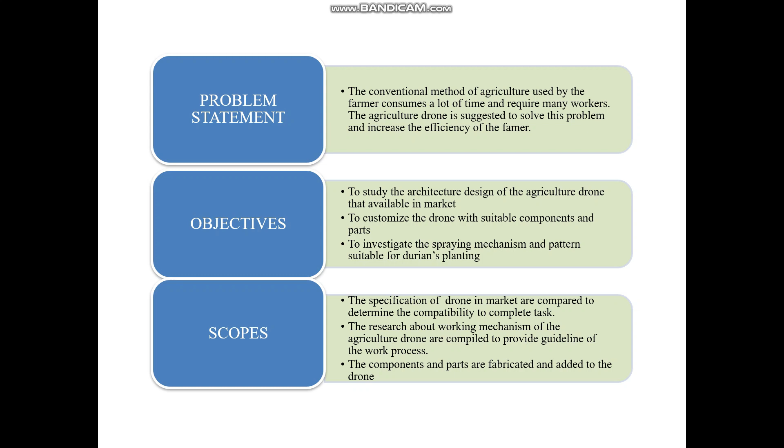Next, I will proceed with the literature review. There are four types of application of drones in durian agriculture. The first one is crop spraying. The drone can be used to apply fertilizer to the durian tree. The foliar fertilizer method can be used, where the drone applies diluted fertilizer directly to the leaves of the tree.

Next is spot spraying. The drone can spray individual weeds and also target insect infestation without needing to cover the entire crop. The third application is crop mapping and surveying. The farmer can use a drone equipped with camera and sensors to collect information regarding the overall crop and plant health, land distribution, current crop cycle, and a detailed GPS map of the crop area.

The last application is irrigation monitoring and management. The drone can be equipped with a thermal camera to spot temperature differences and patterns to measure the existence of moisture. This will prevent moisture stress suffered by the plant.

Now I will continue with the basic principle of the drone. The drone is made up of chassis, propeller, motor, flight controller, and battery. The chassis acts as the skeleton of the drone that holds all the components and parts together. The motor rotates the propeller to provide the required lift force to fly the drone. The flight controller contains an onboard computer to control the rotation of the motor and the direction of the propeller. And the battery is used as the power supply for the drone.

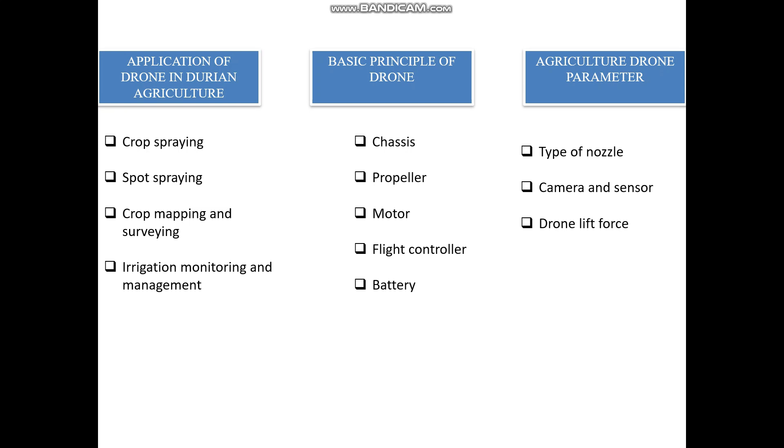Next, I will continue with the methodology of this project. This is the flowchart of my project. It starts with the literature review and the comparison of drones in the market. Then, product specification, conceptual design, screening and scoring were made to obtain the design of the drone. If the design satisfies the customer requirement, then I can proceed to the detail and fabrication. After that, the prototype of the drone is ready to be tested.

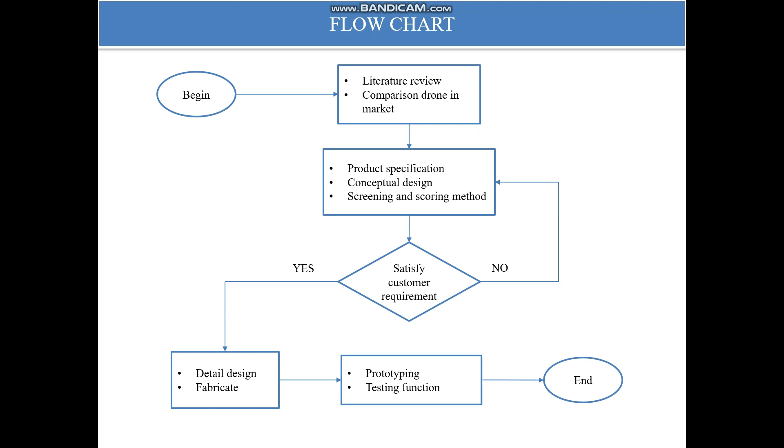I will proceed with the customer requirement. The first one is spraying function. The product needs to be able to apply fertilizer, irrigation, pesticide, and herbicide to the crop. Second is portable design. The product needs to be easy to be carried around anywhere.

Next is affordable price. The price of the product should not be too expensive for the consumer. As for the durability, the product should not break easily by random hazard. And lastly, reusable. The product needs to have a long lifetime and can be easily recharged for continuous uses.

Next, I will go through the engineering characteristic. For the type of material, the material used for the drone will be mostly reinforced plastic that is durable, lightweight and flexible. Next is portable design. The drone can be disassembled to smaller components and can be reassembled back easily.

For the operating system, the drone can be operated by using a radio control transmitter as commanded by the user. Next is the reusable. The parts of the drone can be easily exchanged if failure of a component occurs. And lastly, for functionality, the drone can have multiple attachments such as different types of spraying nozzle.

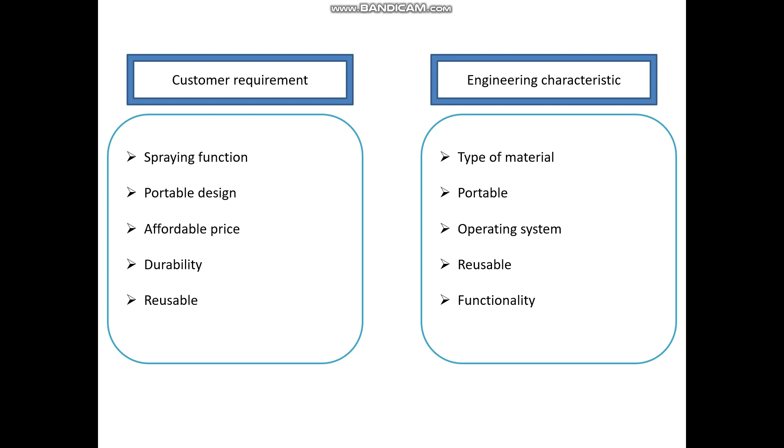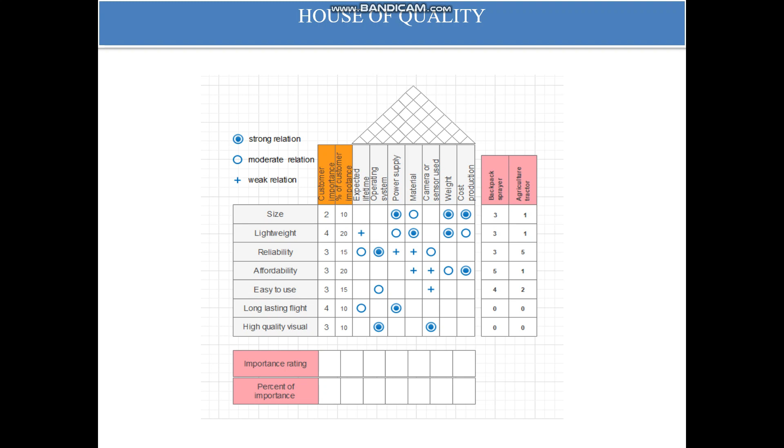This is the house of quality that compares the data defining the relationship between the customer requirement and the engineering characteristic. This is the morphological chart that provides several options such as the type of drone, the spray tank, the type of visual, the input power, and lastly, the type of nozzle.

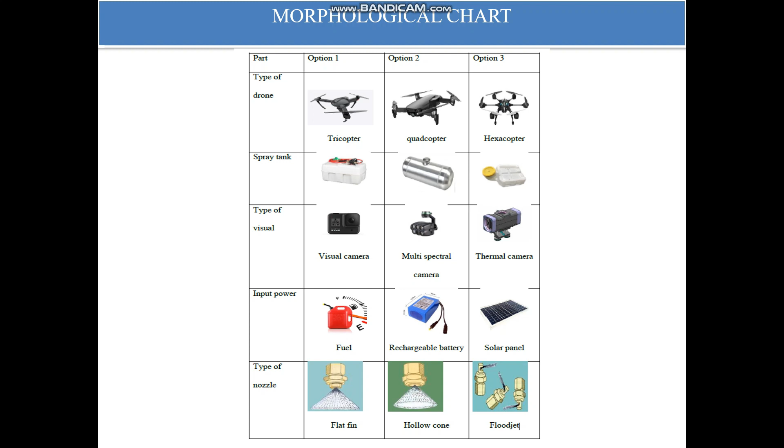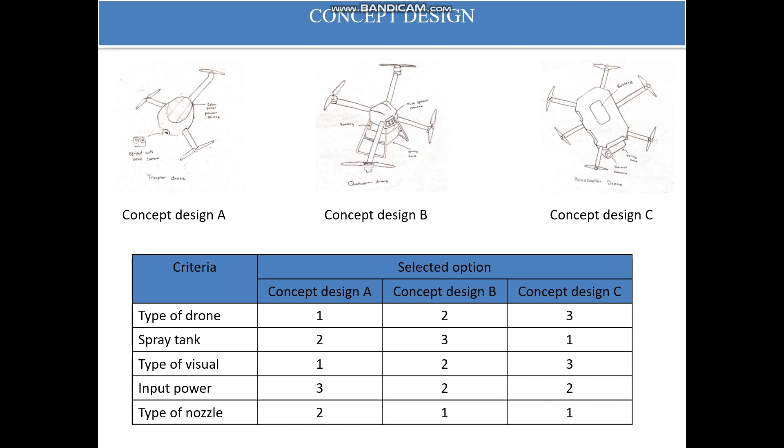Now, I will continue with the concept design based on the morphological chart before. The table shows each of the selected options based on the criteria from the morphological chart to obtain concept design A, concept design B, and concept design C. Next is a screening method. In order to choose the best concept design, we can compare the strengths and the weaknesses of each concept by using this method. Concept design C received the highest score compared to the other concept designs.

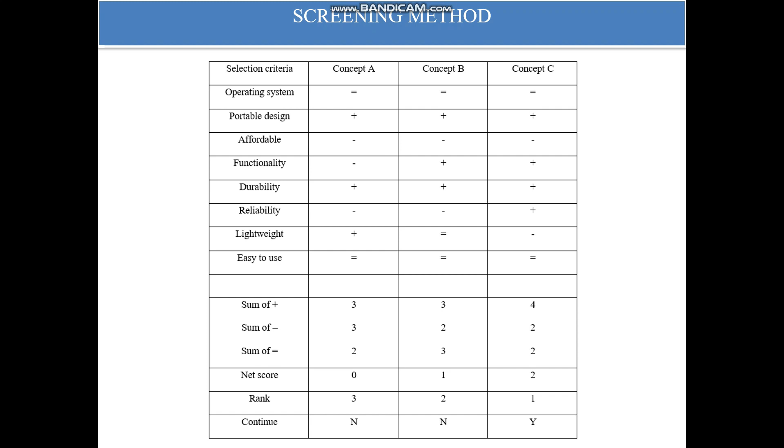The weighted decision matrix is also used to evaluate the concept design by ranking them with a weighting factor and scoring the degree to which each design meets the criterion. In this method, concept design C also received the highest score.

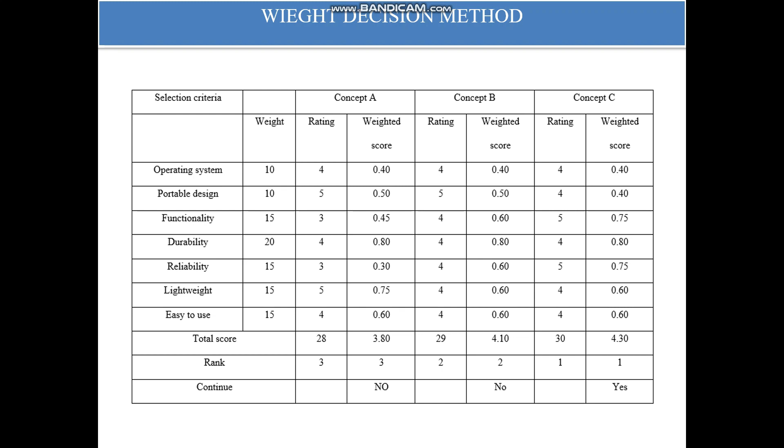Next is fabrication and testing. The design of the components of the drone will be done in SolidWorks software. Then the model will be realized using 3D printing technology. The components made are assembled correctly to be ready for the testing session.

The drone is then tested in the field, starting with the takeoff, navigating the terrain, carrying payload, and applying the fertilizer. The cost analysis of making the agriculture drone was made. The price was based on the biggest online e-commerce company, which is Alibaba.com.

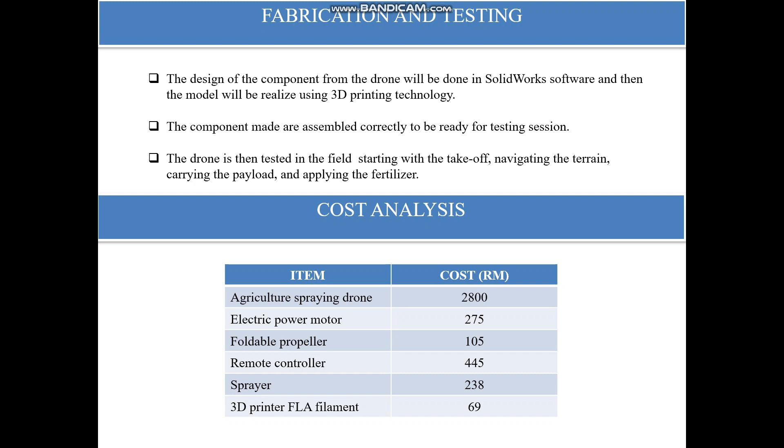As a conclusion for this project, the study helped to obtain the correct features for the drone. All the possible options have been evaluated to determine the best choice. With proper analysis, the flow of the project has become easier. The future plan of the project for the next semester: this project will focus on the fabrication of the components, prototype testing, and analysis of the results obtained.